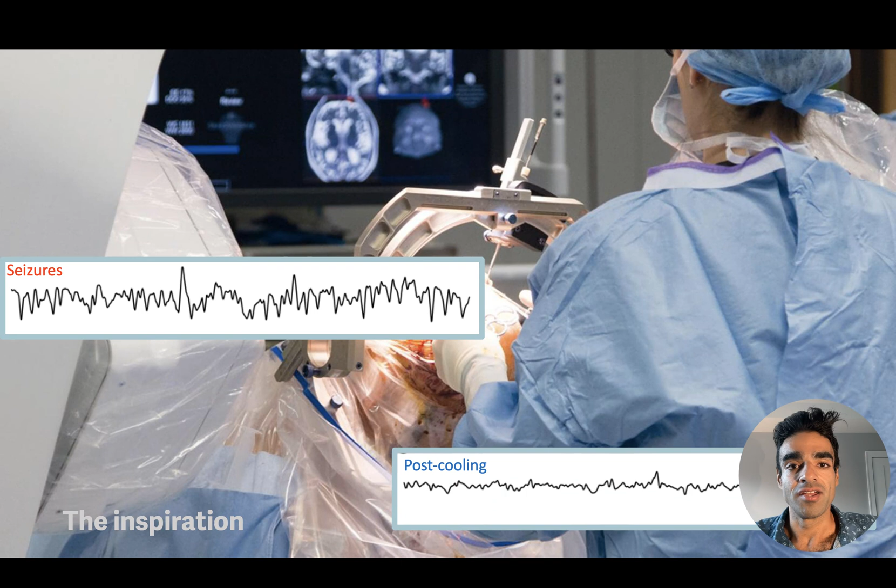Now, our technique is based on an observation neurosurgeons made. When you quench or irrigate hot brain tissue with ice-cold saline or Ringer's lactate, you return to baseline. You're halting seizures immediately. It's a technique called focal cooling. 24 follow-up studies confirm that focal cooling works. And I used these findings, plus input from neurosurgeons and patients, to design and patent SeizeFreeze.

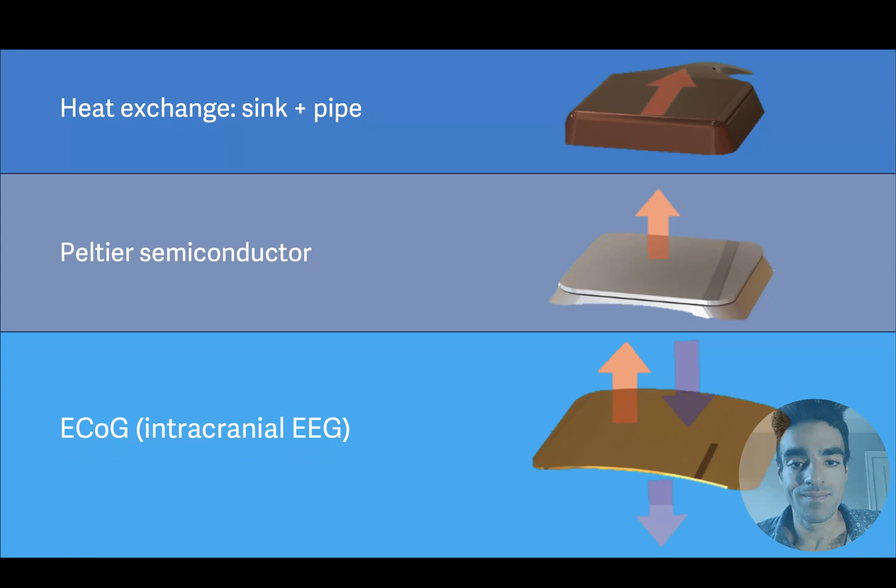It consists of two parts: the cortical unit, the business end, that interfaces directly with the brain, and the controller plus battery that's going to be clavicle mounted. The cortical unit has three main layers. First, we have our detection layer. Think of it as EEG, but inside the skull, so we know exactly when to turn our cooling mechanism on.

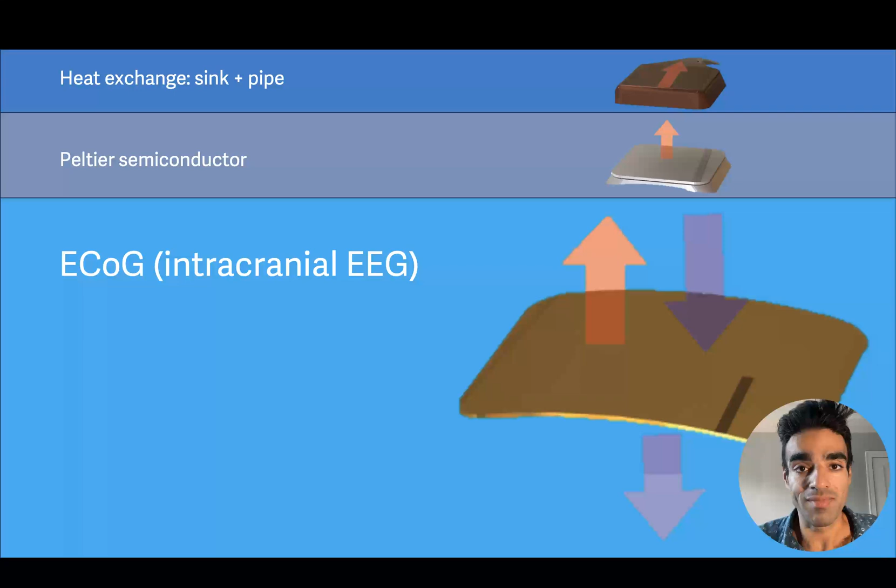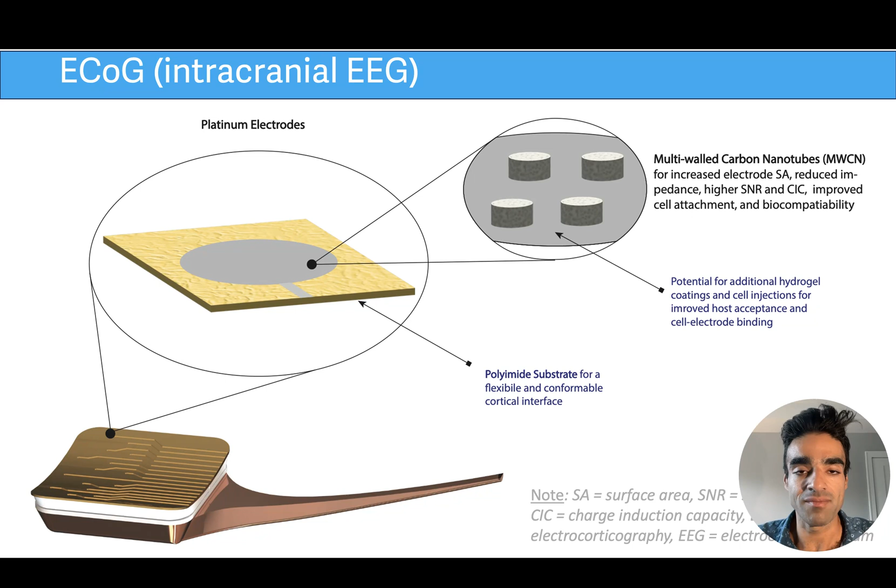This layer is in direct contact with the brain, so it'll be engineered for maximum biocompatibility and for long-term implantation. It's based on state-of-the-art methods I've learned in Pitt, such as using platinum-coated electrodes and a substrate made of polyimide.

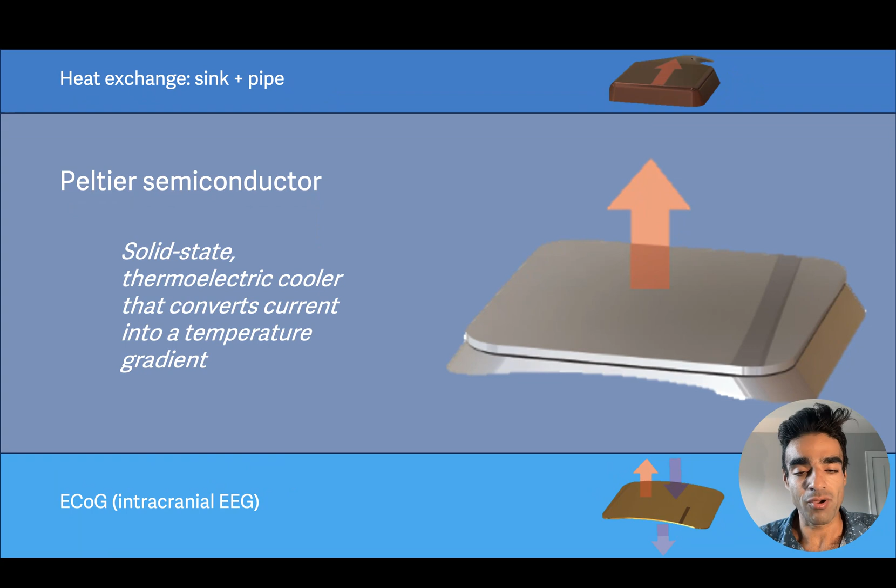Here is where we perform thermal neuromodulation. The seizure is detected, our Peltier thermoelectric cooler is activated. This is very reliable tech that NASA uses in space shuttles to chill water without moving parts.

It's an active circuit element that allows current to go through NP junctions in series to produce a thermal gradient in parallel. In other words, it'll take in electricity and convert it into coldness on one side and heat on the other. While one side of the Peltier device is cooling down the brain to alleviate the seizures, the other side is heating up.

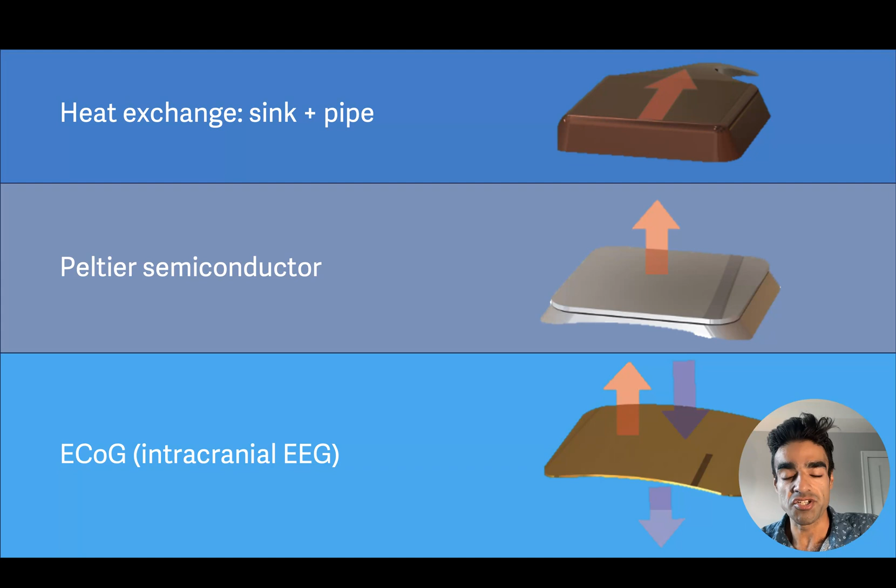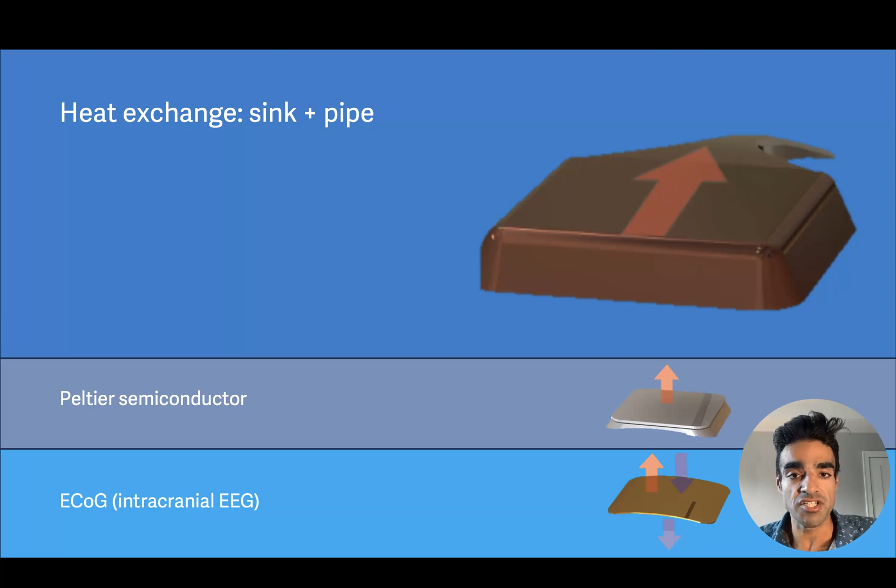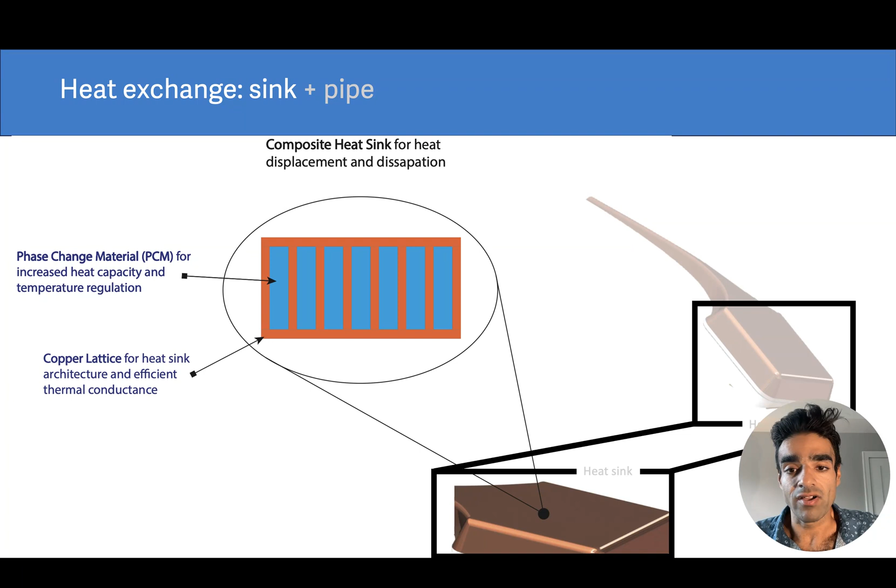So on the hot side of the Peltier chip, we have a heat exchange complex. It first consists of a sink to collect and funnel the waste heat. It'll be made of a copper wire mesh and encapsulated in medical-grade silicone. The heat sink then tapers into a heat pipe.

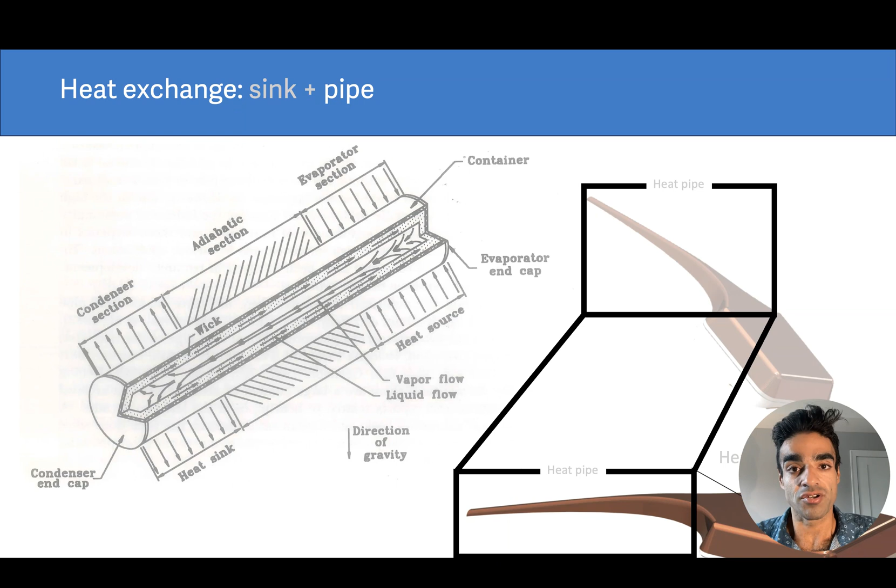The heat pipe will contain a working fluid that will absorb any latent heat from the Peltier chip instead of radiating externally. This will prevent local heating from harming the patient.

I've identified the suppliers so I can assemble the MVP and we can begin preclinical testing on organoids and animals. Join me in moving this from concept to reality so we can impact millions around the world with epilepsy.